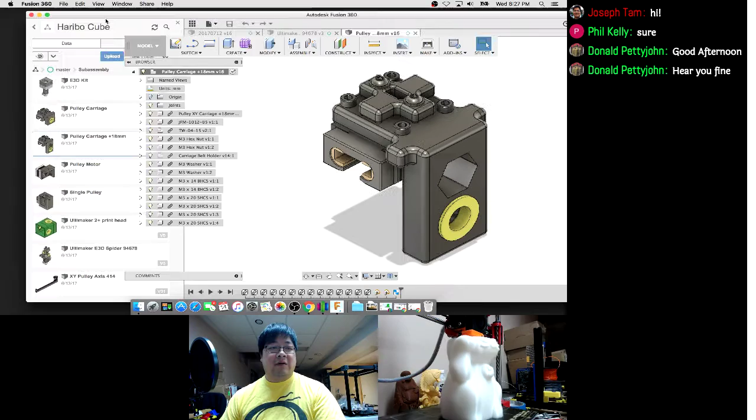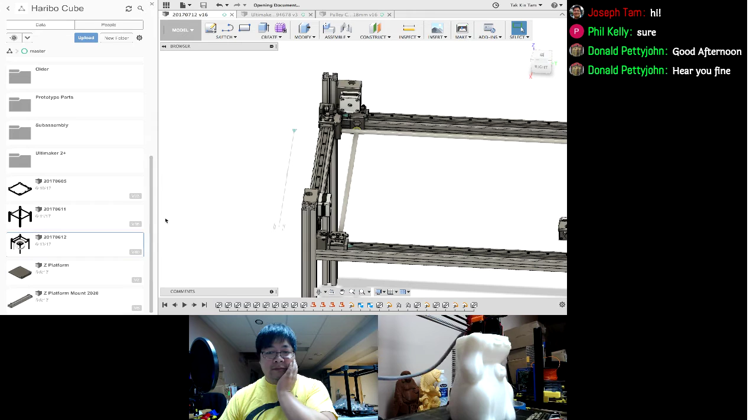So, a couple of things. Let's go back to our design for a second. Hey, this is the upgraded one already. Yeah, this is it. Maybe go back to 11.

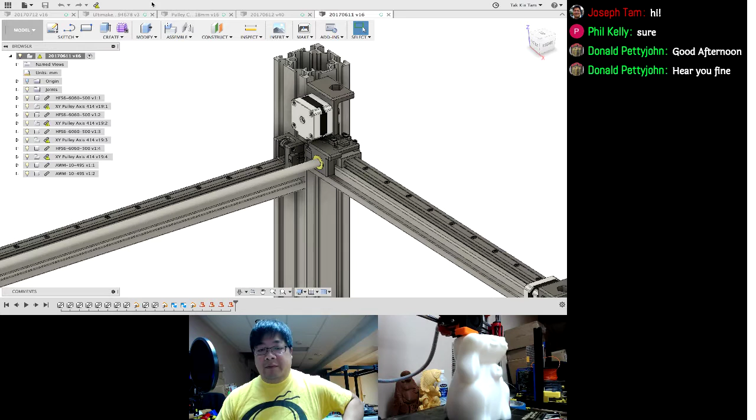Okay, so basically, there's two things I want to show on this drawing, and then I'll move on to the design changes that happened in the last 2 days. The reason I want to show this is to explain how the enclosure is going to work.

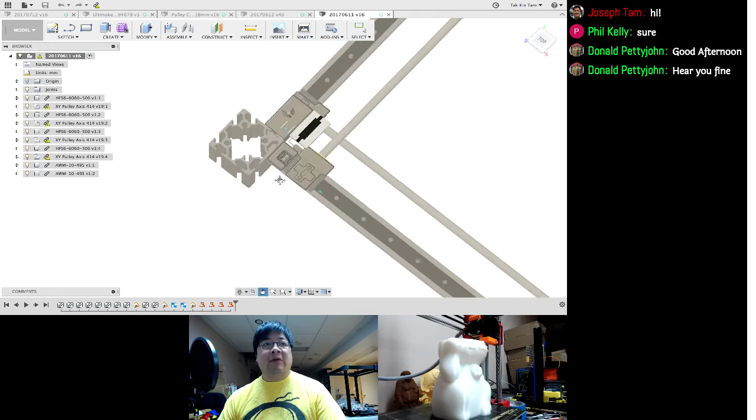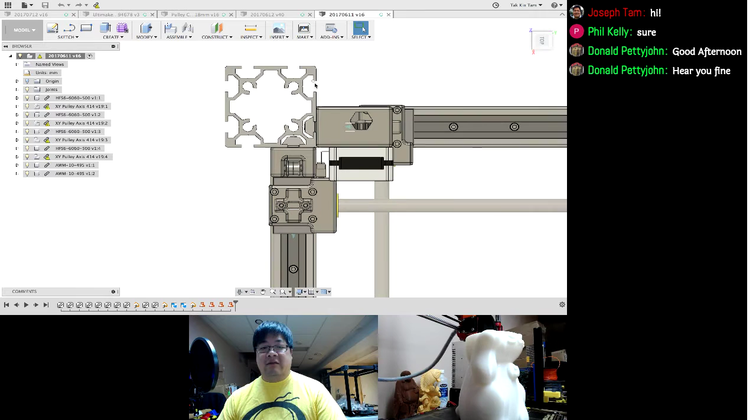I think I explained this the first day. If you notice, I kept all the mechanics on this side of the extrusion, even the motors on this side of the extrusion, keeping this area and this area clear. I explained the first day the reason why I did that is because that slot in here and this slot in here is where I'm actually going to add the panels for the side walls.

Now, if you don't need an enclosure, like I won't need an enclosure for my use, you can actually go with a 30-30 in the corner and it'll still mount the same way. You just don't have these extra corner pieces here for the extrusion.

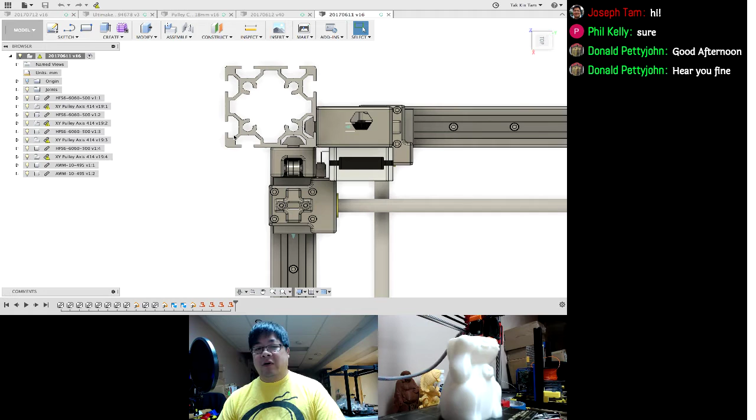That was a pretty hard, fast rule. I was keeping myself kind of constrained in that because I didn't like the fact that some enclosure walls mount on the outside extrusion. It just didn't look right. This one at least makes it look like a window in a picture frame, so that you can actually slot them into these grooves.

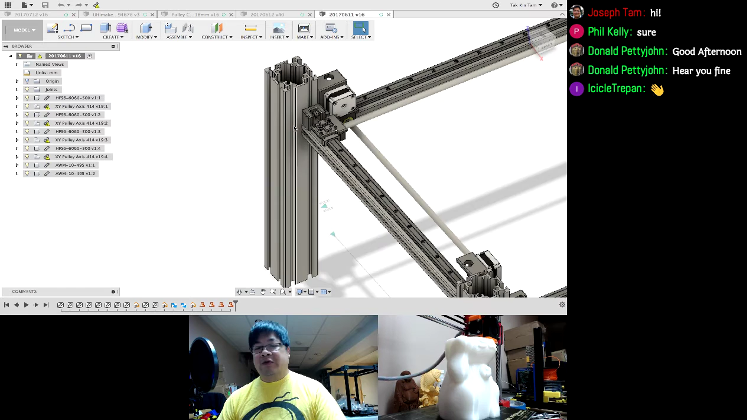So I kind of kept that as well. One of the difficulties I thought I would have in the beginning was how do I get this cross beam here and have one continuous panel? As you can see, right now this area here, you could actually get one continuous panel in there, and it'll enclose top to bottom.

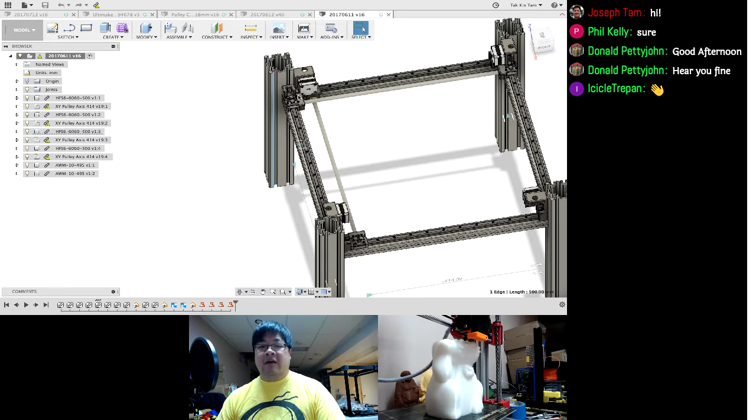So the idea is that you have, sorry, 3 panels: one for the left, one for the back, and one for the right side, to enclose the 3 sides of the printer, and then you will put one big piece on top for the top of the enclosure, and one on the bottom.

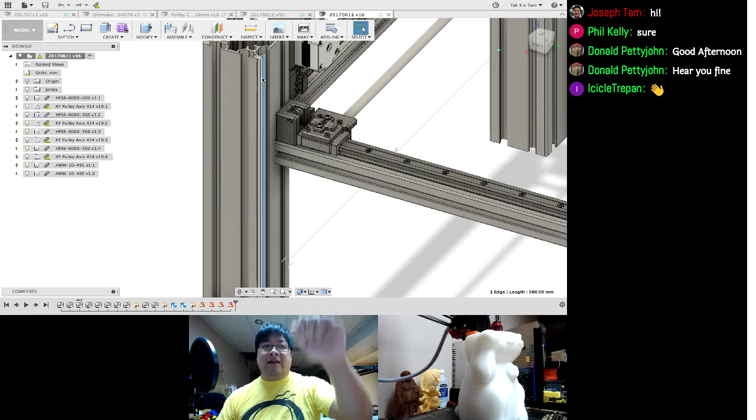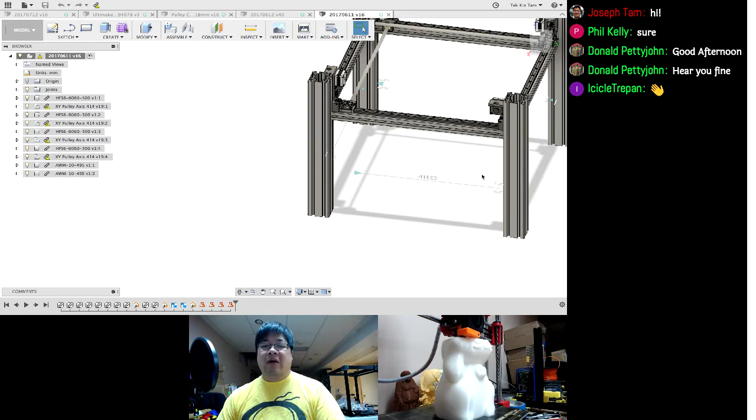The front is going to be a little unique. We have 2 options. Either we make a sliding door which goes in this groove but slides upward, kind of like a dumbwaiter that you open up, or you can have magnetic attachments on these 2 sides here, and you would put the panel on it, with little handles that you take off, and it's held on by magnetic forces. That would work too, but basically the idea is the front is going to be where the opening is, and you have to play around with how you want to enclose the front.

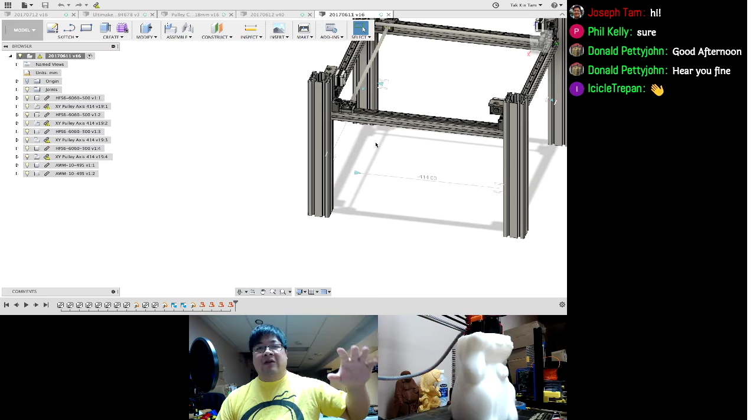Personally, if I was to enclose it, I would use the magnetic panel on the front because it's easy to remove, and you put it on the side. You can have it fully open if needed on the front, or have the panel on. I don't like dealing with hinges because with hinges you open up and have this heavy door hanging, or you have to build a frame for it, or if you have just plexi, then over time the hinges will crack and you end up with a broken door.

So the easiest way to do it really is to use a magnetic door, and we'll get into that design later when we get to that stage.

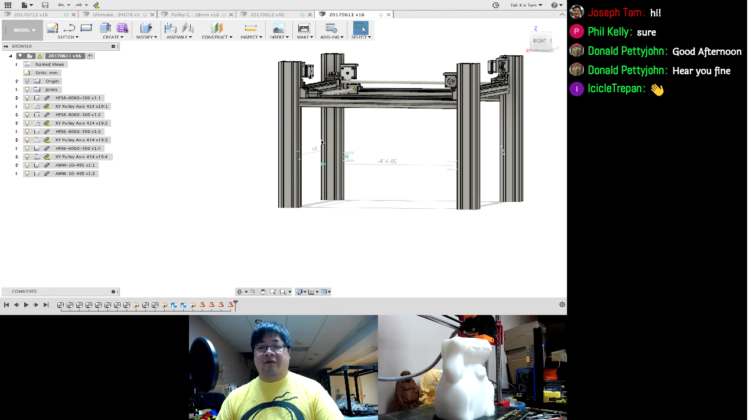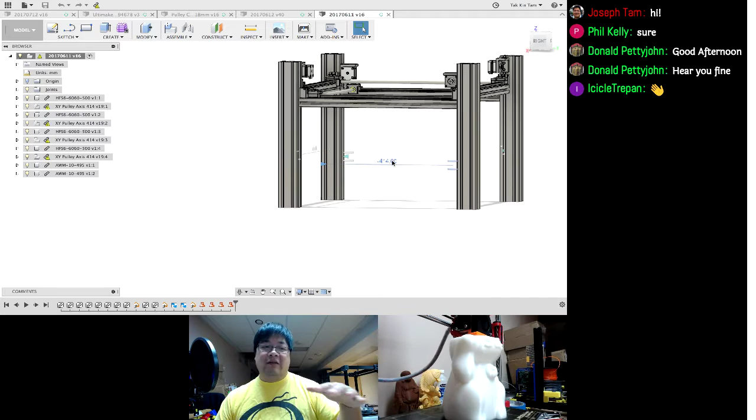I haven't really come up with how long these 4 vertical members have to be because it depends on the Z platform. The top is pretty much set, this is going to be the area, and I found there's enough room here for the extruder to move around and still have the bolt come out in a reasonable manner. So I think the top is pretty much set. It's just how tall the bottom legs have to be to support the 420/500, depending on how long we get the lead screw, the Z platform to come down.

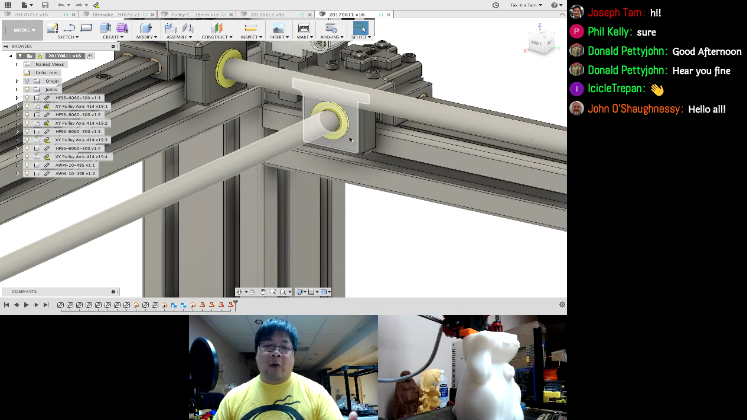So this is the older style rod mount. We weren't sure how long to make this, how low to make the rod mount, so we sort of left it at that while we were test fitting. So we had to make some revisions for that.

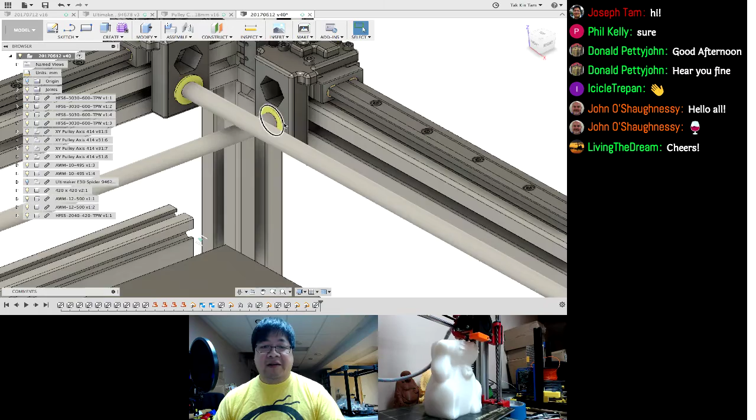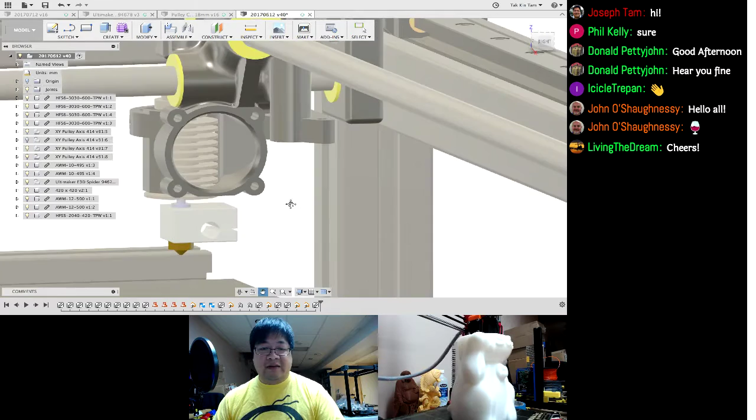I'll show you the revision. This is the revised edition of that design. What we ended up having to do was lower that rod mount by 18 millimeters so that it would clear the bottom of this extrusion. I'll bring back the spider and hide this one so you can see better. So the reason for that is we had to lower this rod so that this spider is physically lower by 18 millimeters.

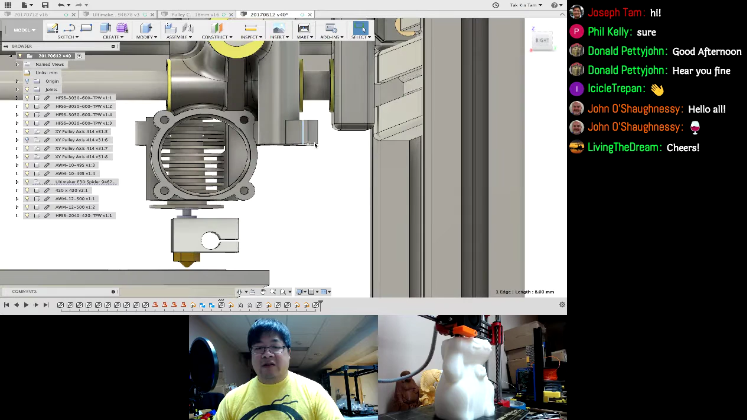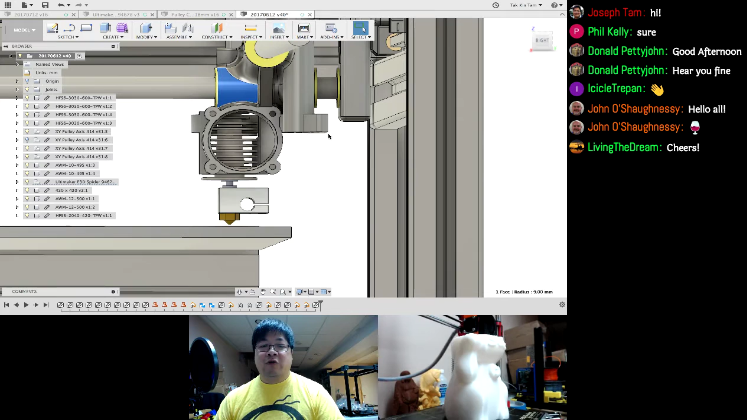This is where the parts cooling fan actually mounts onto this spider. I'm gonna try to get a good angle here. You can see that it just clears the bottom of this extrusion. When that rod mount was 18 millimeter higher, this whole spider was 18 millimeter higher, and this fan mount was directly here, where the fan would hit the side of the extrusion. So right now, by lowering 18 millimeter, I was able to put the parts cooling fan in this general area, so it blows down towards the part.

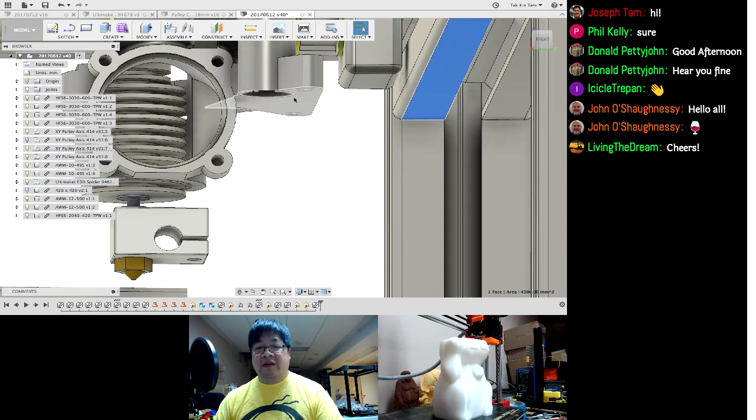Let me hide the bed too so I get a better view. This surface is physically lower than this one. Let's see if I can show that. This surface and this surface are 2 millimeter lower, actually 2 millimeter lower than the bottom of this extrusion.

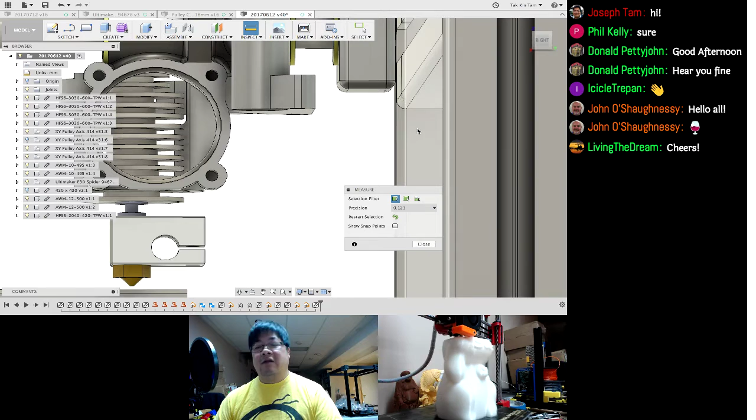So any fan could protrude into this space. This space is normally dead space anyway, so you can actually protrude into that space. I think you can put a 50 millimeter fan sideways and have a duct blow down on the part.

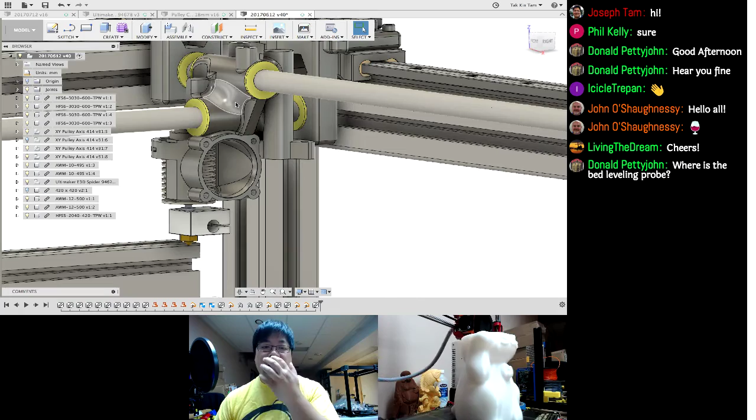This is one of those E3D mounts for the Ultimaker that I found on Thingiverse. It's not perfect, it doesn't fit the E3D well at the notch, but it's just here to give you an idea of what it's going to look like and how far down it's actually going to hang.

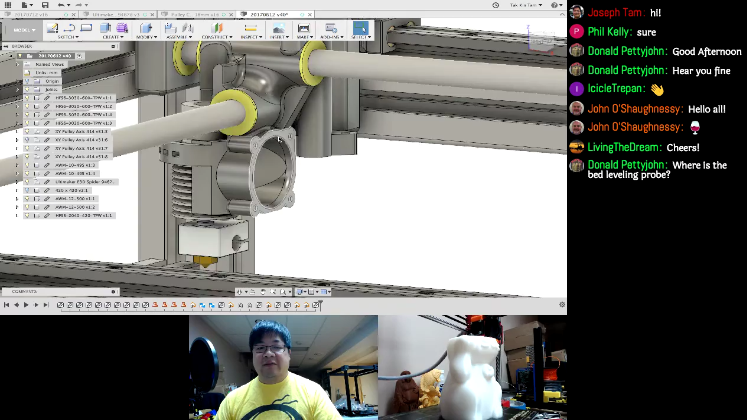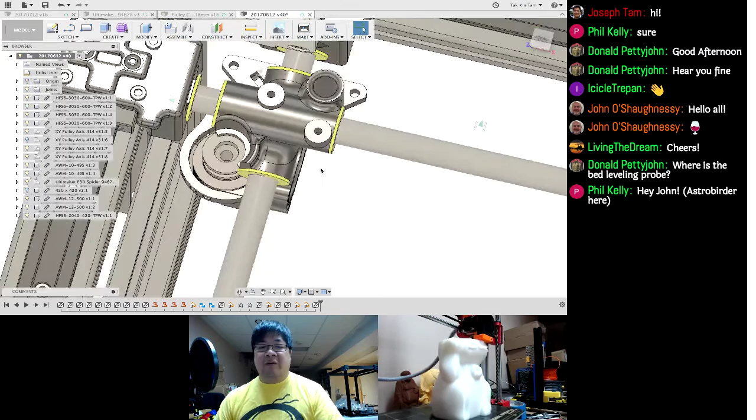Basically, the problem we have is that the cross rods prevent you from mounting the E3D in the middle of the cross rods. So either you have to offset it to this corner, or the back two corners, usually one of these two. Now, I don't really like this mount that much, probably end up redesigning one myself, but I will end up putting the E3D on this side because that'll give me space in the back and the side for cooling fan.

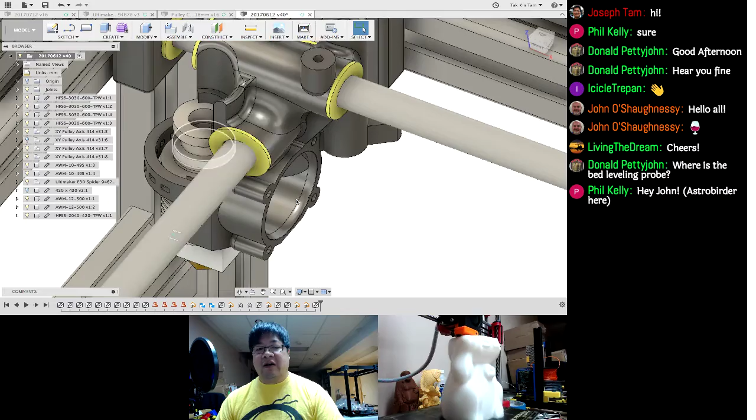So basically, I'm thinking I'll have one cooling fan from the left to the right and then one from the back to the front, and then I'll keep the orientation of the heat sink fan here but off to the side, because we'd have enough space that way to do all that maneuvering.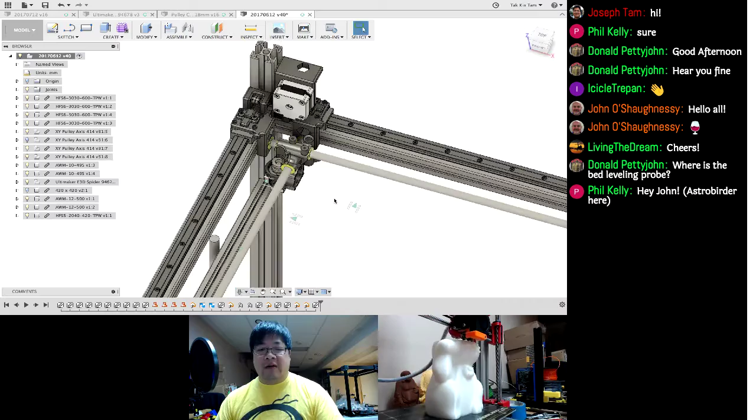Trying to remember what other changes we made. I think we talked about this change last time. I made the belt holder beefier so that it would have an extra tooth of engagement on there. That was the change we talked about last time.

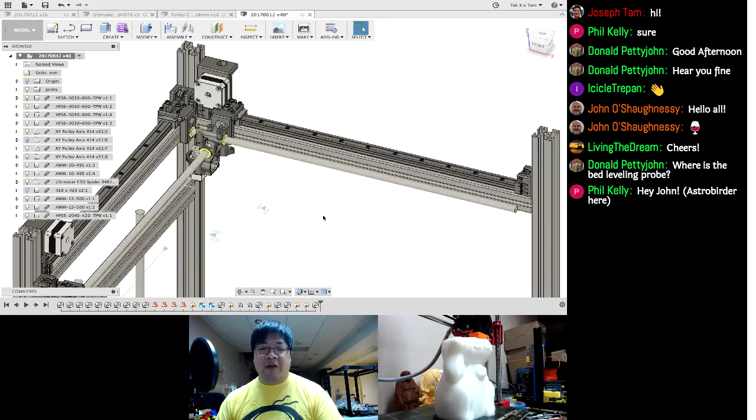Now with the rails and the new pulleys, we're getting a full 420 by 420 ish travel. I started to lay out how I want to bring these all back, laying out how I would use the 12 millimeter rods and the lead screw to lift this platform.

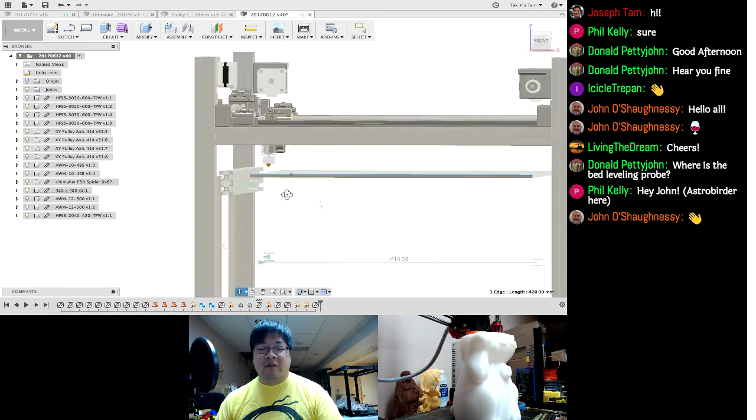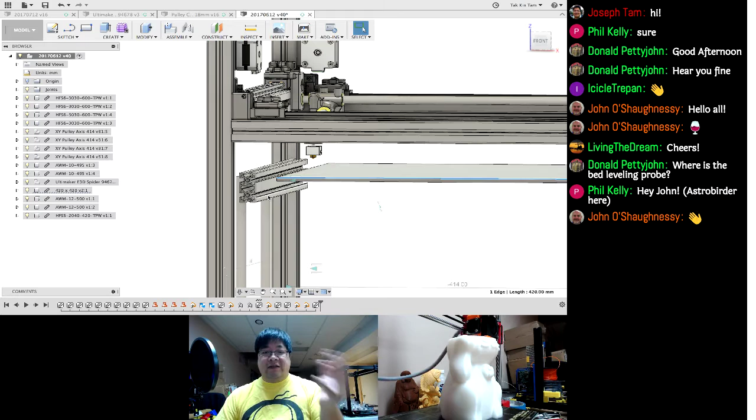Haven't really came up with a solution yet. I know we had looked at using a 2040 as a frame for the platform. I'm debating that right now, mainly because of the weight and whether or not I need a 2040 on the bottom of that. Today's Wednesday.

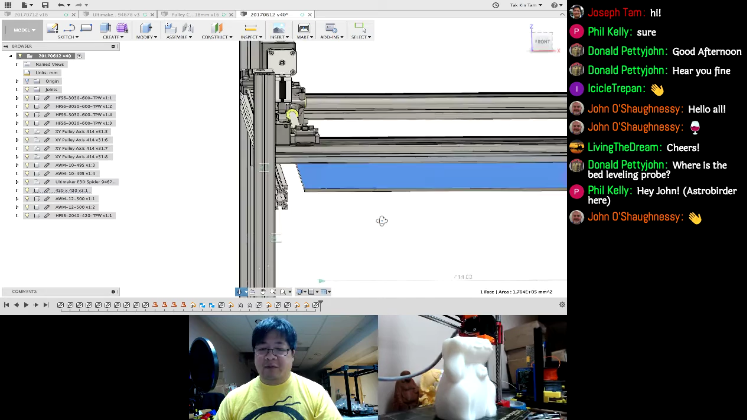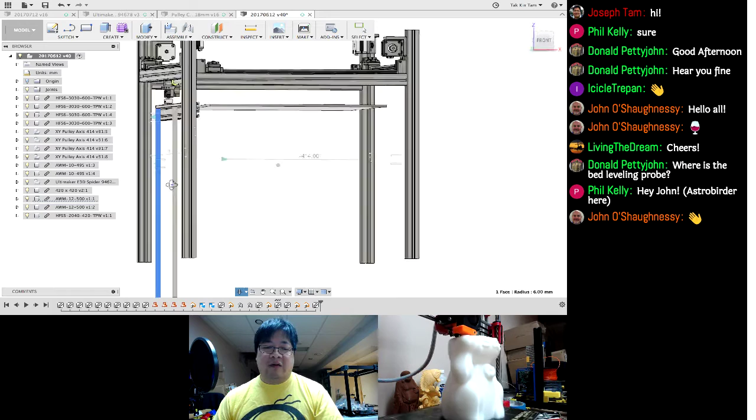I think I'll probably figure it out by the weekend. But first thing I want to do is figure out how to mount this aluminum plate to the side extrusion first. Then from the side extrusion, I will work my way to the 12 millimeter smooth rods, which would dictate how I position the lead screw. Right now, these are extra long because I'm not sure exactly where we end up with the travel, so I might have to lengthen these 4 corner legs to get the 420 that we need.

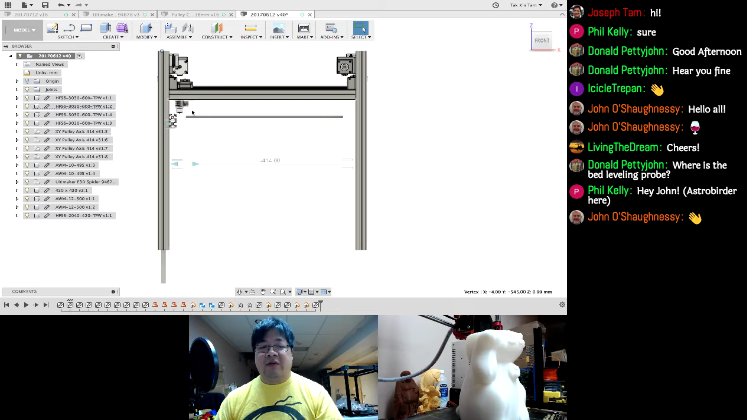If you look at it from the side profile, you can tell we're already down a good 200 millimeters - from here to the top is probably a good 200mm already just for the XY gantry, plus the E3D lowers down to take up some space. So to get 400, we're going to have to get at least a 600 length extrusion here, and then I only need a cross beam to hold the smooth rod.

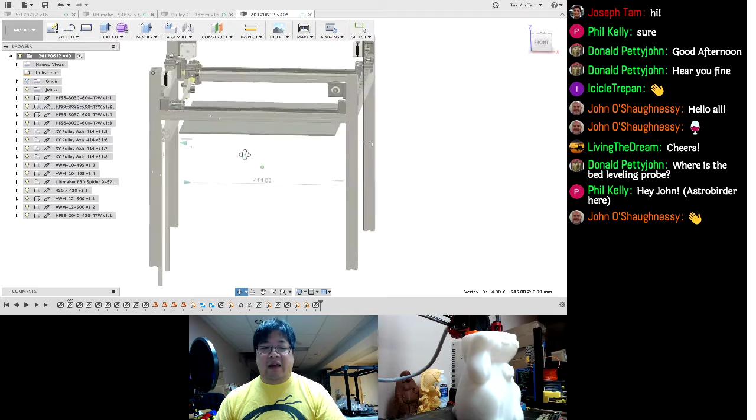Let's see how it goes, because being 420 by 420, there's no way I'm going to be able to use a single cantilever from the back like the Ultimaker does. Ultimaker is basically only held on the back, with an extended platform that comes out and is cantilevered so it only moves on the back, up and down.

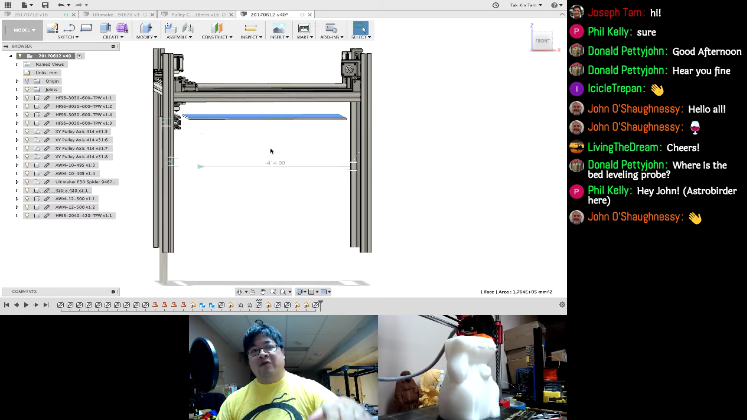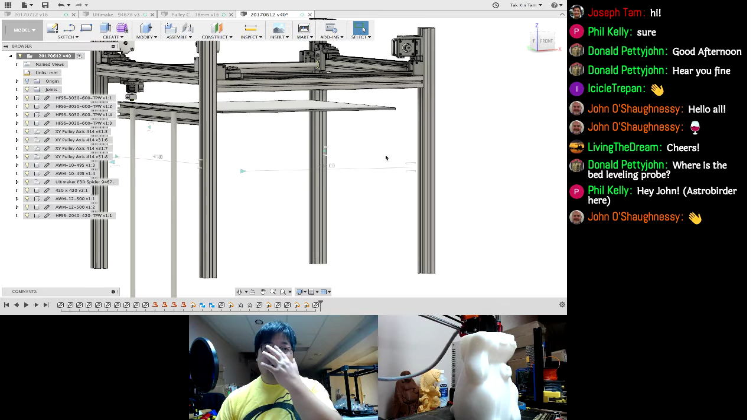But the problem is I calculated the weight of this plate to be 7 pounds, and having 7 pounds on that cantilever is not going to work. So we're going to have to support it on both ends - 2 rods on one side and probably 1 rod on the right side. Remember we talked about this: if you go with 4, meaning 2 rods on one side and 2 on the other, you cannot balance that. You can't balance 4 things.

So you kind of want 3 so that you can easily balance the weight. The one on the right is basically just going to be a follower, whereas the 2 on the left are going to be the main guides. We'll have to play around with that once I figure out how to actually get the plate to work.

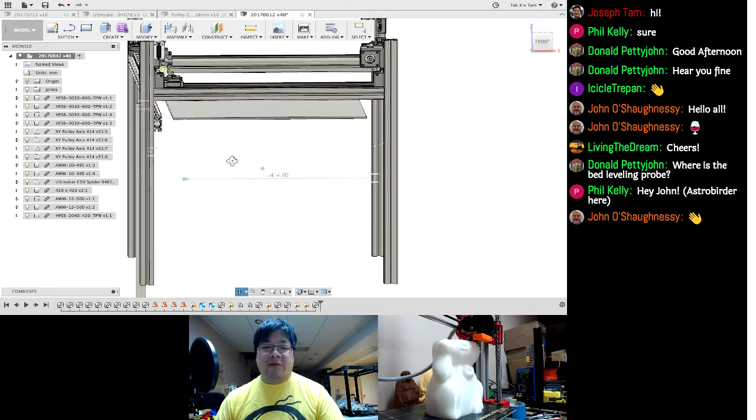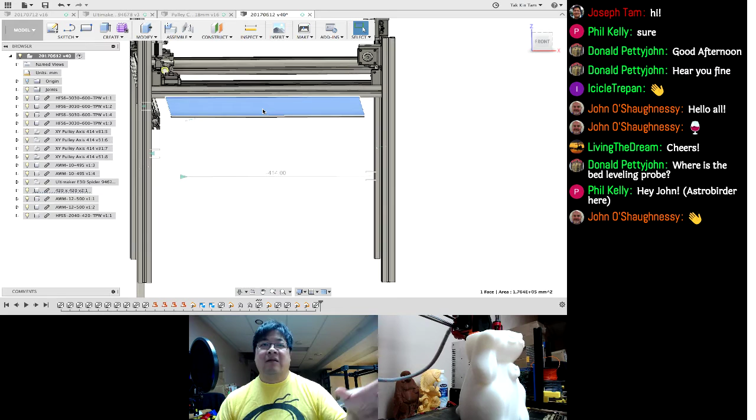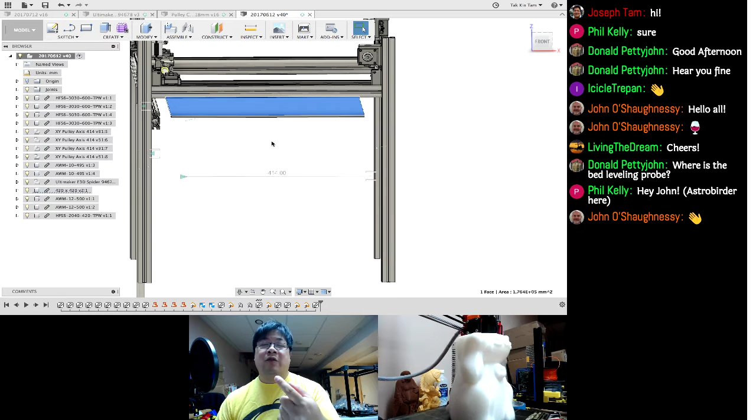I found it's kind of hard for some people to source this, so I'll see if I can source this plate, as well as getting a custom heater, because 420 by 420 is an odd size. Most likely it's going to be 400, maybe 380. If we do 380 by 380, that gives us a 20 millimeter perimeter around that we can mount the 2020 extrusion onto, to support the plate. So we'll probably end up going up to about 380 or 360 for the silicone heater. You don't really have to go edge to edge, because the silicone heater is going to heat the whole plate, so as long as you get good coverage we should be fine.

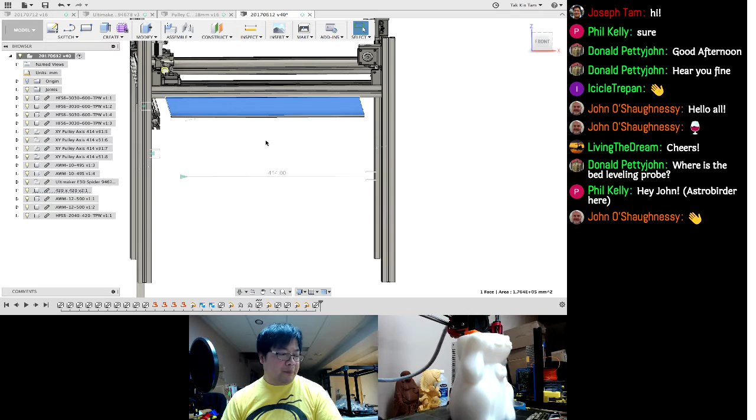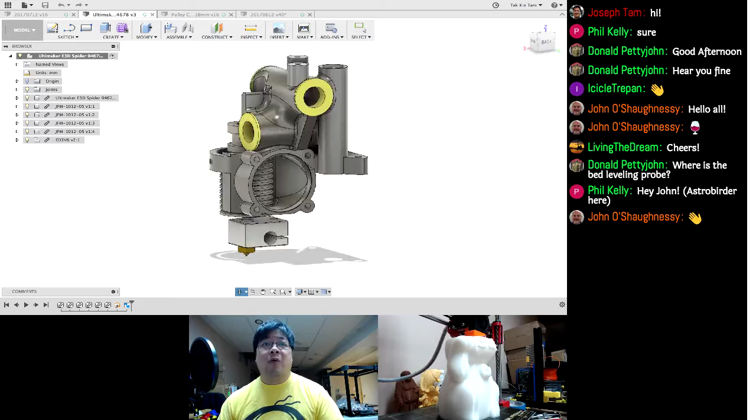What I was going to show here - I showed this one where we added the 18 millimeter downward step to bring this rod down 18 millimeters to clear the parts cooling fan. There was a question about the probe. The thing is, this doesn't really support a probe, so that's the other thing I have to work out - use this as a starting point so it will fit the E3D and the probe in there somehow.

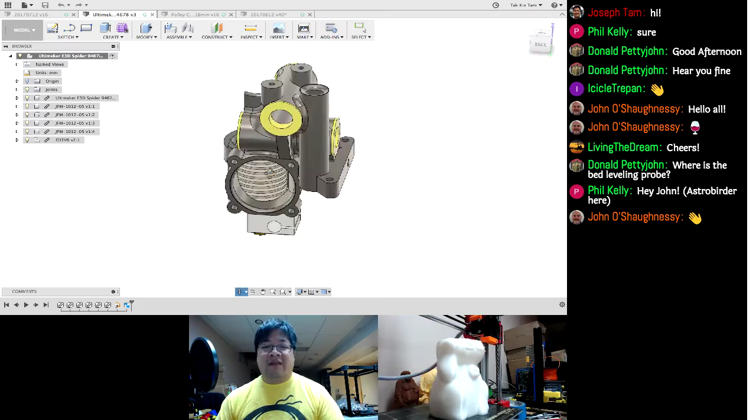I was thinking I'd get away with not dealing with this, but it doesn't look like it. It looks like I have to spend the time on it. So we kind of revise the schedule a bit.

What I want to do is finalize the XY, because right now we're close - we're like 80-90% done on the XY. In Fusion 360 it looks fine, I just have to get the right parts ordered. Once I get the XY correctly modeled and physically prototyped working...

Then finish off the Z, so basically the XYZ movement is going to work. We can send it out to the alpha guys to get some feedback on setting it up, setting up the firmware, getting the movement and stuff like that. Then in the meantime, I'll work on the spider and getting the extruder and all that other stuff worked out, because there's no point going to the extruder and all that other stuff if the XYZ hasn't panned out.

So that's probably the plan - finalize XYZ, get all the parts ordered, start building the frames, and then get the plate, the aluminum plate, the silicone heater in, the firmware working, everything heating up, whatever it is.

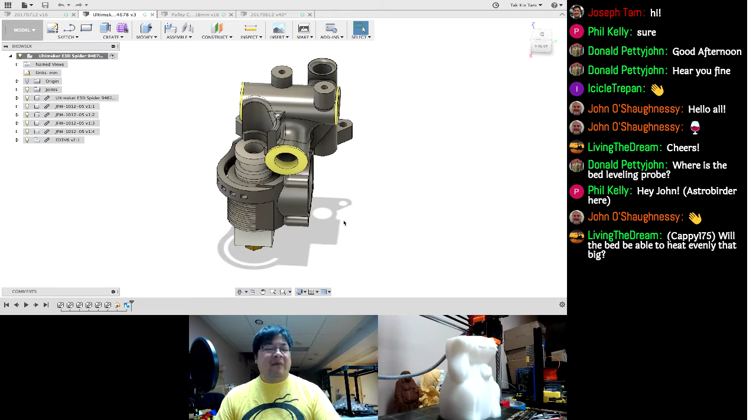Then by that time, it should buy me enough time to finish off the spider, or we go with the Ultimaker one, like I mentioned before, which is the Olsson block. We go with that. I mean, it is a proven system, so it's not E3D. If we go E3D, we're gonna have to deal with this. So let's just see how it goes. Like I said, I want to finalize the XY.

So while I'm on the subject, let's talk about ordering the parts. What happened was I had jumped the gun sort of. I went in and ordered the rails and the carriages and stuff like that before the redesign. So we had a redesign, and before that, I ordered 400 and 500 millimeter rails and 495 and 595 rods.

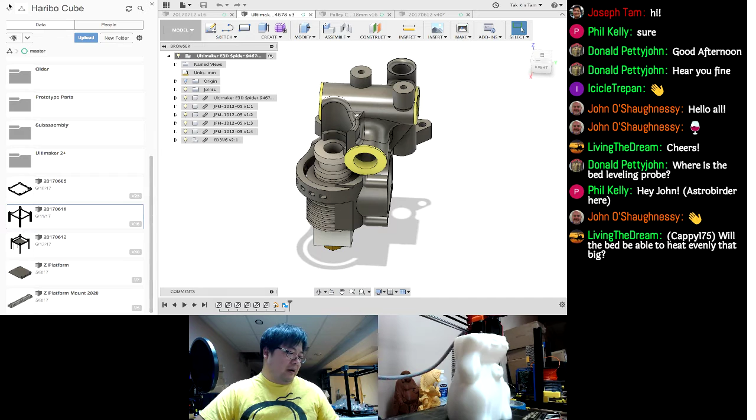I could use the 495 rods because the new design still uses that. But the 400 rail is too short, the 500 rail is too long. I think it worked out to 456 millimeter rail I need. So the 400 is too short, 500 is too long, right about 50 millimeters more and less.

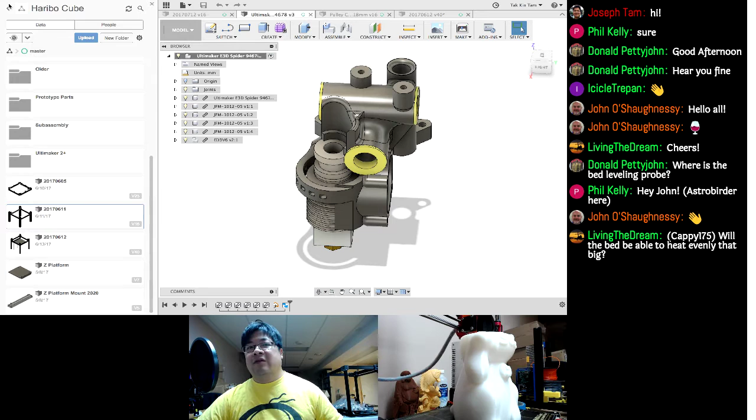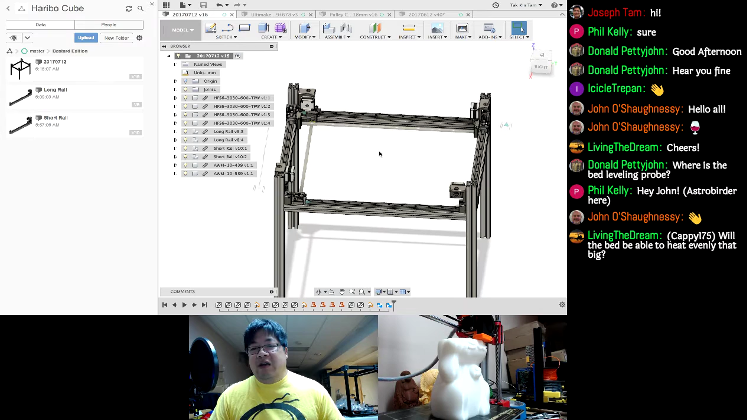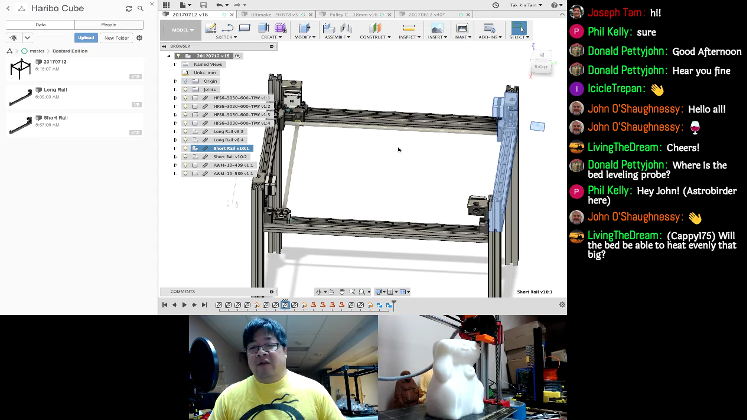So I decided to come up with the bastard edition of the Alpha 420. What that means is, let's see, I think this is the one. Yeah, so what that means is that I'm going to reuse the part as is. This rail here, the long rail, is using 500 millimeter rail. The short rail, I guess this would be the Y in this case, is the short rail, and that's 400.

So basically, this is a 358 by 458 XY, and whatever length, whatever height that we decide to go with for the Z. There'll be two of these because I have two sets of rails. They're already spoken for. I was going to offer them up, but they were spoken for already. So they are going to get alpha tested the way it is, 358 by 458.

It is wider than deep, which some people would be able to use. So I figured that instead of going to waste, I'm going to send it out the way it is. It would still prove the idea, right? Because it would still work the same way. The dynamics are the same, so it would still prove the XY gantry, like the crosswalk gantry idea. Why bother cutting stuff and returning stuff if you could just reuse it?

The only thing we have to do, because we are at, I think this is 539. So I had a 595 rod bought, so I cut some off that 595 rod. This is a 439 rod. The other rod was 495, so I cut about 60 millimeter off of that as well.

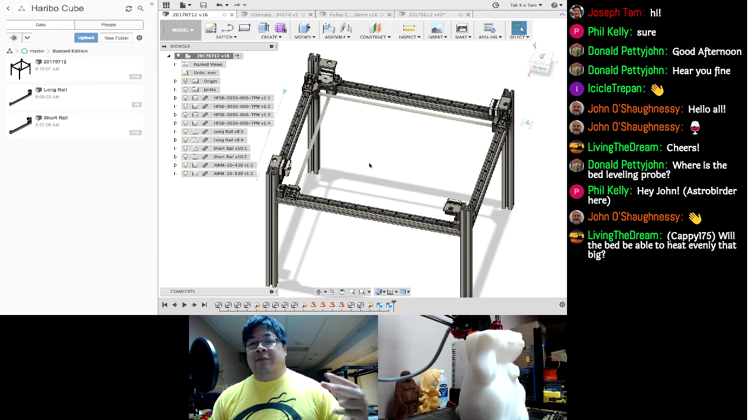That means, number one, I won't waste anything. Number two, I won't delay the first 2 or 3 alphas from doing any work, because this will definitely go out and be reused. So there's only going to be 2, unless you're going to go and order those 400, 500 millimeter rails yourself. But this is a 2-off, so there's only 2 of these ever going to be made by me.

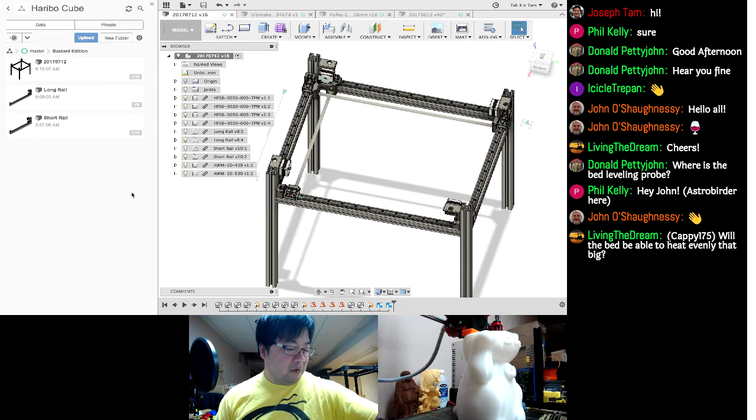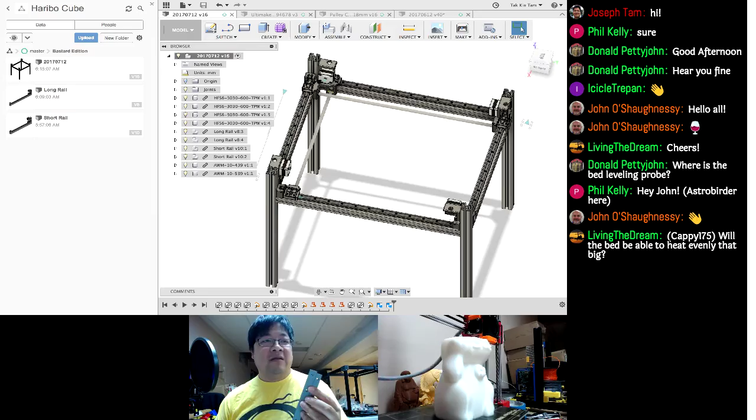So let's talk about the igus stuff I got. This was the original sample rail I got. This is the 13mm rail, and this is the 15mm rail. You can tell that physically they're a lot... let me just bring it up. You can tell that this is the 13, this is the 15, so it's quite a bit bigger in terms of the width.

I wish it would focus, it's too shiny, I think it won't focus on this too. But you can tell it's considerably wider. So I anticipate that this profile is going to work a lot better than the 13. I'm glad I went with the 15, cost is about the same. This was the 500... yeah, this is the 500 rail that is going to go on the Bastard one.

Comparison - I got the wrong carriages and had to return these and get the right ones. These are the 13mm carriages, these are the 15mm. You can tell they're taller and wider, though this isn't a good angle to show it.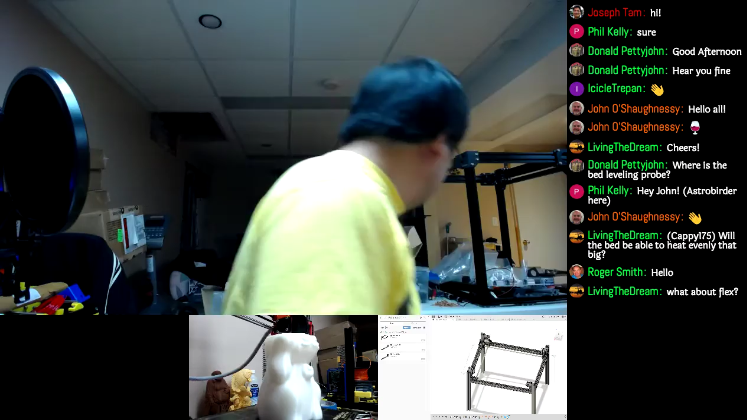Let's see, where's my knife? Give me a second. Do I have my knife? Oh, there we go.

I'm gonna do some unboxing here. I got some stuff in the mail. And while I do this, any questions?

Flex - yeah, that's one concern I had about using the aluminum. But the thing is, I remember last time I talked about the steel rod. The steel rod is going to be a little bit...

Oh, that's my dad's flashlight lantern. What was I gonna say?

The problem with the steel rod is, yeah, it doesn't flex when you do this, but the weight of it will cause it to sag a little or flex a little. So I'm hoping that the aluminum rod, if we're not putting too much weight on it, the weight of the rod itself won't really have too much impact on the flex. That's really kind of something I have to deal with.

I'm gonna ask them if they could send me a hollow one. From what I understand, the hollow one is actually gonna have less flex than a solid one. So I'm gonna have to do tests on either one - by test I mean just actually use it and see which one is gonna flex and which one is not.

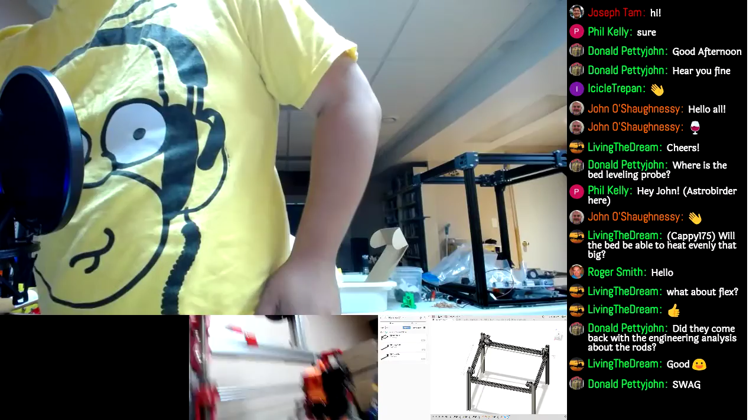Let's see this for you guys. Not sure it's actually gonna make it.

Um, yeah, so these were the 400 millimeter rails. So it's not too short, and 500 would be too long. So we're gonna make the bastard edition out of them. What else can I cover?

Yeah, I guess let's go. I'm curious, let me just go. Let's go see what Scott had said about my post.

I'll go check before I show you guys. He kicked me out, dude. See? That is funny. I'll confirm this guy. So if anybody else is left in that group, I think Jason's left in that group. Switch back.

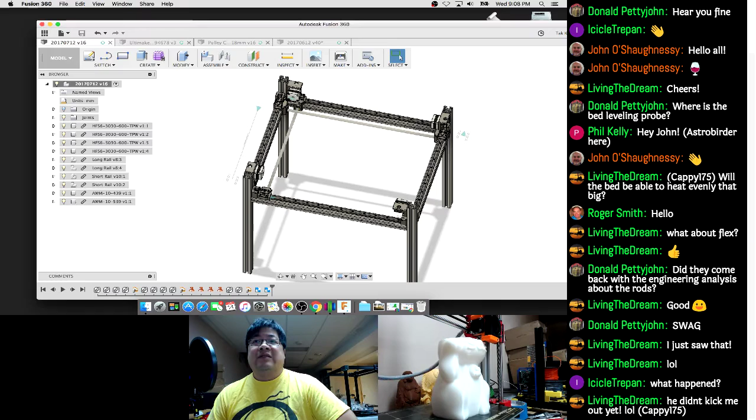I was expecting the extruders soon, but I haven't gotten them. No, not the extruder, the hot ends, the Cyclops hot ends. I haven't seen those, not sure where they are. They should be here by now. The other parts I ordered afterwards already came, so I'm not sure why those didn't. It's kind of interesting, let's see.

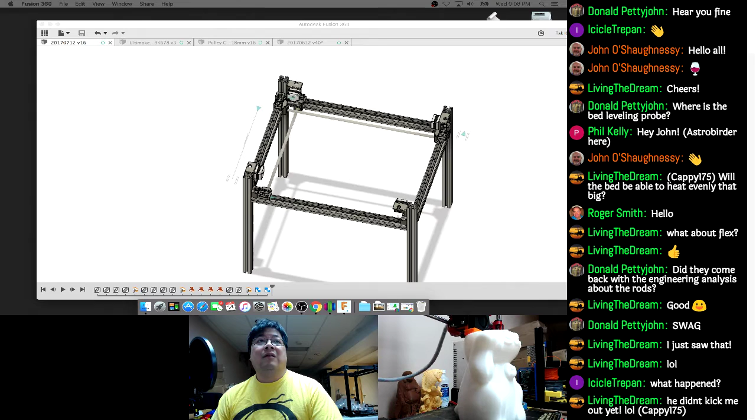There was a lot of dead space because I'm checking some stuff out. Let's just bring this back. I'll minimize this because we're not going to talk about that for now. Let's just go with this.

I think it was this one. Robotic, yeah. So I'm thinking about going with this particular lead screw slash NEMA 17 combination. It's $50 a piece, a little pricey, it's $67. I'm trying to see if I can find another one, but it's 500 millimeter length and it's the right step thing, and the amperage is not too bad. So I'm thinking of going with this one.

He does have a shorter one, I think like a 460, but it's the wrong spec, it's 8x12. 8x8. I think I could probably get him to do a one-off because he does do it, he just replaces the threaded rod. But I think this is the one I'm going to go with, the 500 millimeter 8x8 for the Z.

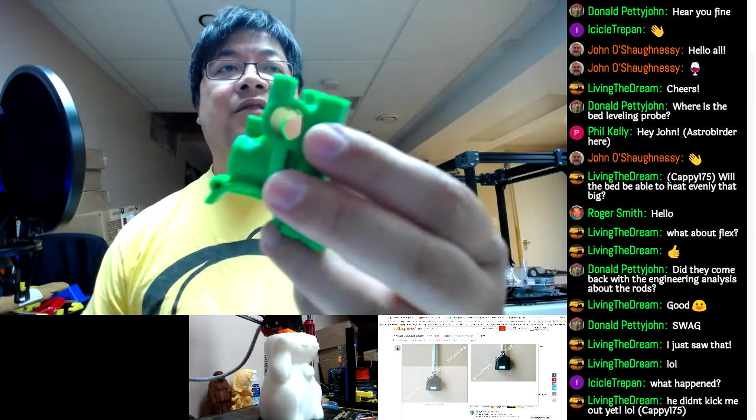Yep, there you go, so this is the spider that was shown on that model. I tried to fit the E3D in here, it doesn't work, the notch is in the wrong spot. So I'm thinking this is either for the V5 or something like that, or the knockoff. If the guy had shown a knockoff on it, basically what he does is put the E3D notch on there, and this band is the only thing keeping it in place.

So I don't really like that design, mainly because you're only held on by one strap and one nut trap - your entire hot end is resting there. And the other half of this contraption is basically like that, and that's the fan. It is nice, he split the print to two pieces so that this print's flat. There's a little bit of a bridging problem there, but it's just in the middle of the fan shroud so you're not really gonna affect it anyway. The design is pretty good.